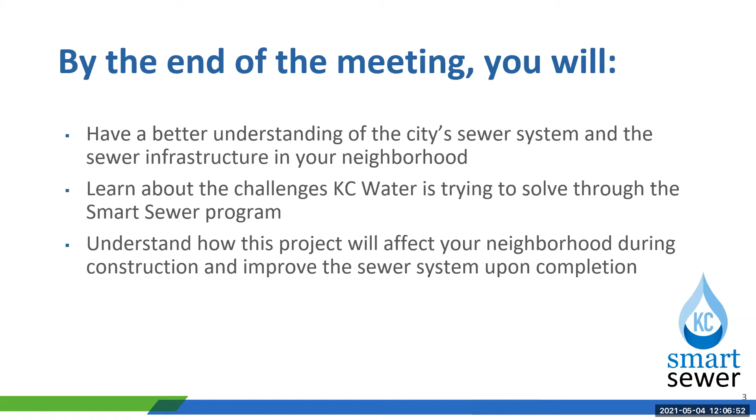Next, please. Just to give you a quick, broader view of KC Water services and assets. We serve our customer needs for water, wastewater, and stormwater, and we manage an extensive list of public assets, as you could see, a few numbers on the screen.

A few highlights. If you look at our system as a whole, very extensive water assets, specifically our underground pipe systems. We have almost 6,000 miles of underground pipes that move water, whether it's drinking water, wastewater, or stormwater, through our three water systems. This is a lot of pipe. Just to give a little feel for it, it's more than a round trip driving between New York City and Los Angeles. That's how much underground pipe we don't see, but that we own and manage.

We also have one large water treatment plant and 6 wastewater treatment plants, safely treating drinking water and wastewater and discharging through that operation. We have a lot of other various assets in our system that help move water from point A to point B. Next slide, please.

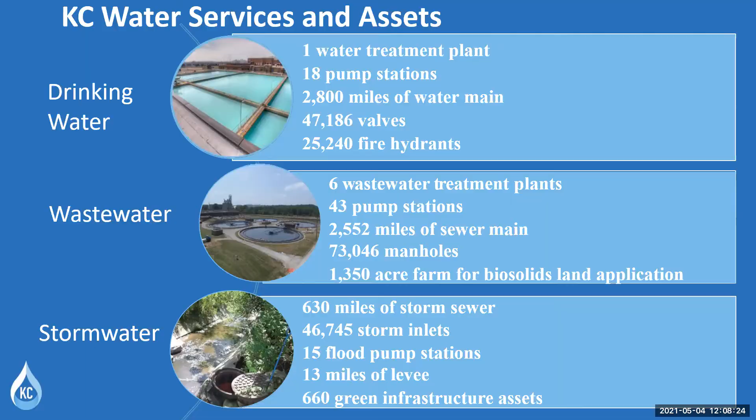Let's focus on sewer systems. In Kansas City, we have 2 types of sewer systems, what we refer to as combined sewer system and separate sewer system. In general, if you look at the map, we have central parts of the service area, about 58 square miles, outlined by the green line on the screen, south of the Missouri River, all served by combined sewers.

Some of these sewers date back to 1857. Outside the combined sewer area, both north and south of the Missouri River, about 260 square miles of the service area is served by separate sewer systems. Both systems are important for what they're intended for, but both pose some asset management and operational challenges, which is why we're talking about this project today. Next slide, please.

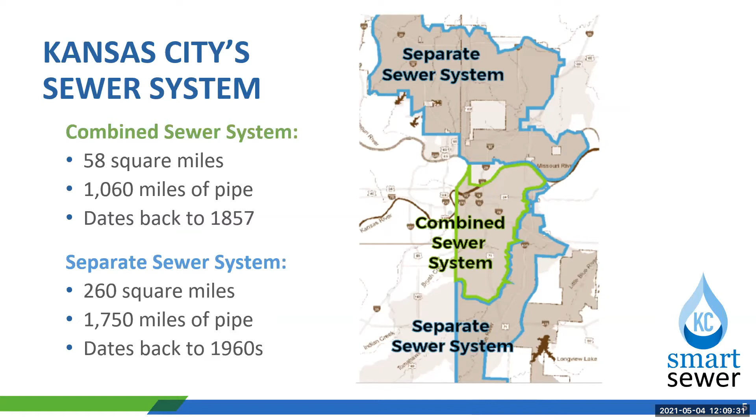It's a little bit of an overview of what we call a combined system versus a separate system, to give you a good reference to our current efforts. The combined sewer system, as you see in the figure on screen, is a single pipe conveyance system to take wastewater and stormwater and convey it to the wastewater treatment plant to be cleaned before it's discharged back into the Missouri River.

As you can see on your screen, the blue line and gray line: gray relates to the wastewater, the blue part relates to rainfall response, rainfall runoff, and stormwater. They all mix together. Now, during dry conditions, like right now, the wastewater is collected and then conveyed to the wastewater treatment plant for treatment.

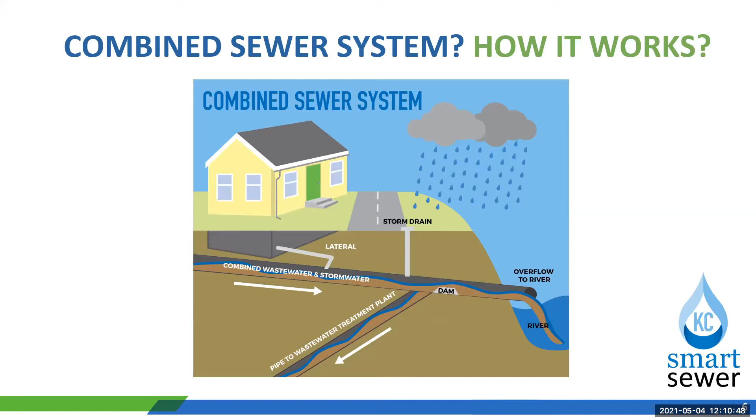When it rains, some of the stormwater runoff also gets into these pipes mixed in, and some of that flow still gets to the treatment plant, but a majority can overflow to the receiving waters. That's what we call combined sewer overflow.

The other system we have is the separate sewer system. In this case, the gray water gets into the wastewater or sanitary system that gets to the treatment plant, and the rainwater gets into the blue line pipe that takes the water to the receiving streams. That's how they're intended to be. While the combined systems were originally designed to protect when the sewer surcharges and backs up, the flow goes to the river, but they're designed to overflow.

However, we realized that creates pollution concerns and whatnot, and that's where the combined sewer overflow regulations came up, and our ongoing efforts to reduce overflows.

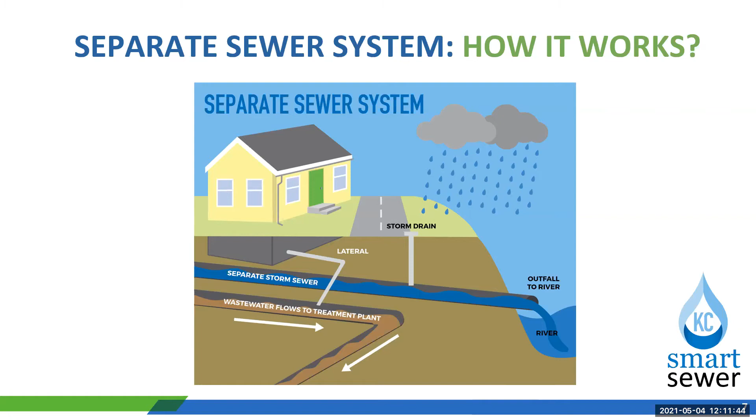Some of the Kansas City challenges you've probably already heard of, but for context purposes: we have sewer overflows because of the combined systems in the areas we identified. In addition, the system is designed to overflow, but our systems are also aging. With aged systems come condition issues. Some of our sewers date back to 1857.

We have capacity constraints in the system that create sewer backups and service issues. Any overflows to the receiving streams or any surface overflows, if they happen due to operational issues, cause pollution concerns, water quality concerns, and public health and safety issues.

While we are managing this vast amount of underground system, our past sewer rates did not reflect the true cost of maintaining this wastewater infrastructure, which amounts to about 2,700 miles of sewer. So we're always catching up, trying to improve the systems and reduce overflows. That's a huge problem for us.

As a result of the overflows, we have a federally mandated consent decree to reduce combined sewer overflows and improve our water environment. As you know, we have what we call the Smart Sewer program to conduct many projects to reduce overflows as mandated in the consent decree.

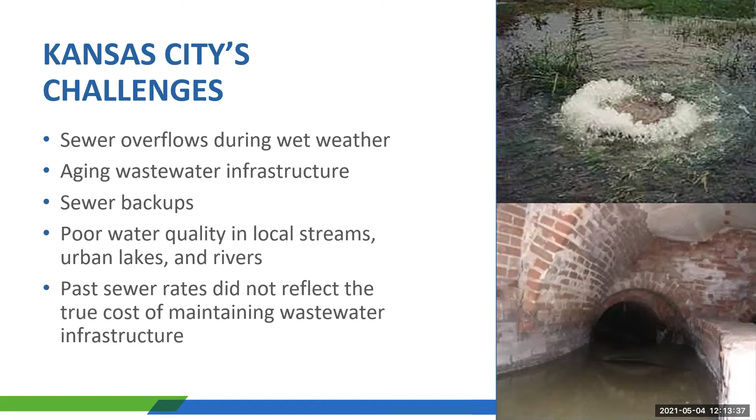Part of that Smart Sewer program involves doing a variety of things, various solution types, in combination to reduce combined sewer overflows, either through a single solution or in combination.

You hear about green infrastructure, sewer separation, which is the point of this project. In some cases we improve capacity of the systems to contain the flow without overflowing. Separate systems also reduce inflow and infiltration into the wet weather flow. So there's a variety of things on the sewer system side, but also adding additional treatment capacity for wet weather flow.

An important part of moving the water is our pump stations and treatment plants. So there's a variety of things all together.

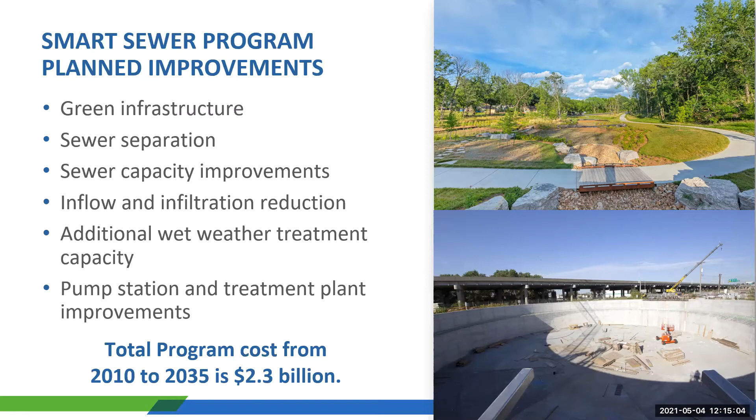At this point, the total program cost from 2010 to 2035 is $2.3 billion. Our consent decree was recently modified as of March this year, with extended completion time for the program through 2040, but we have committed dollars through 2035 from the beginning of the program at $2.3 billion.

Now, the program has many, many projects, but the 31st and Broadway Sewer Separation Project is one piece of the Smart Sewer program. It is required by the consent decree to be completed by December 31st, 2022.

So again, KC Water in this area will be installing a second set of pipes to separate the combined system into one set of pipes for wastewater and one set for stormwater, helping us reduce overflows from the 31st and Broadway neighborhood to Penn Valley Park. So this is the project, and Willie Williams will talk about it in a few minutes, getting into more project information.

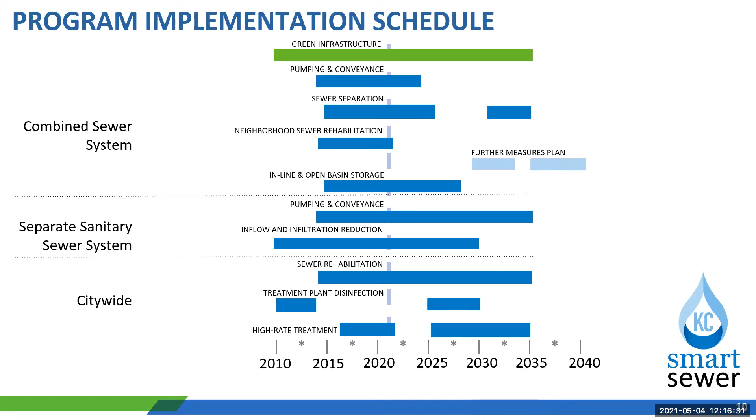Willie? Sure. So yeah, great.

So as the project title says, this is the 31st and Broadway project. Essentially, as Srini described, it's a sewer separation project happening in the Turkey Creek Basin, roughly near 31st and Broadway.

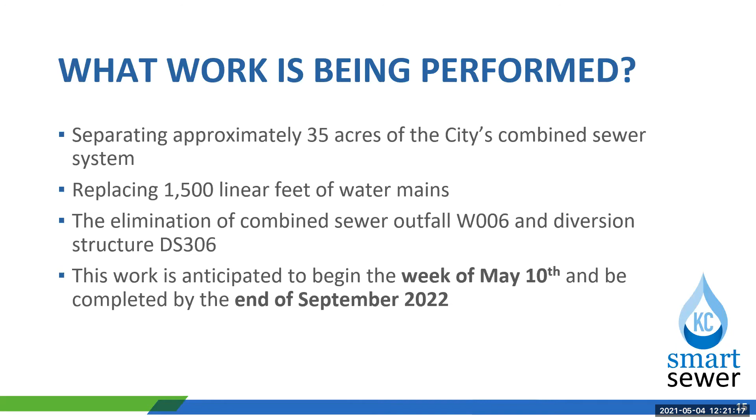The project will have several benefits to the stakeholders in the Turkey Creek Basin. We're going to get improved stormwater collection and conveyance, which can help reduce the ponding that you may have previously experienced in the area.

We're going to improve the reliability of the water distribution system as we replace 1,500 feet of water mains along Central and Wyandotte. We're doing some rehab to existing sewers in the area, such as CIPP lining and point repairs, as well as replacing and rehabbing manholes and some storm inlets.

We're adding permeable pavers in the alley behind contract furnishings, which will greatly reduce ponding that happens in that area. The ultimate benefit of the project is we will be improving the water quality of local streams, specifically Penn Valley Lake.

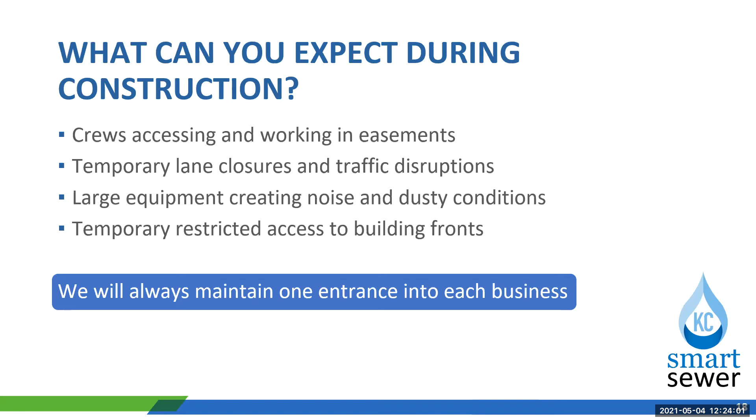Doing good, Willie. Hi everyone, my name is Taylor Rippey and I'm also with Parson Associates. As well as helping with communications on this project, I'm also helping with communications on the upgrades on Main, which I'm sure you all know about, where KC Water is making improvements to the aging water and sewer infrastructure, along with 15 plus private utilities relocating to pave the way for the KC streetcar.

Every Friday before noon, we send a weekly construction update that will let you know what to expect on the corridor the following week, including construction activities related to this project. If you're not signed up for that weekly construction update, I would highly recommend signing up. You can find that at kcwater.us/upgradesonmain. I also sent it in the chat a little bit too early, so I can send it again so you can find it.

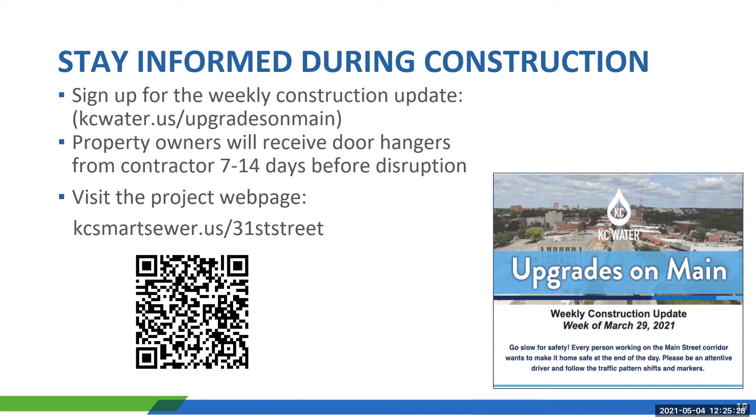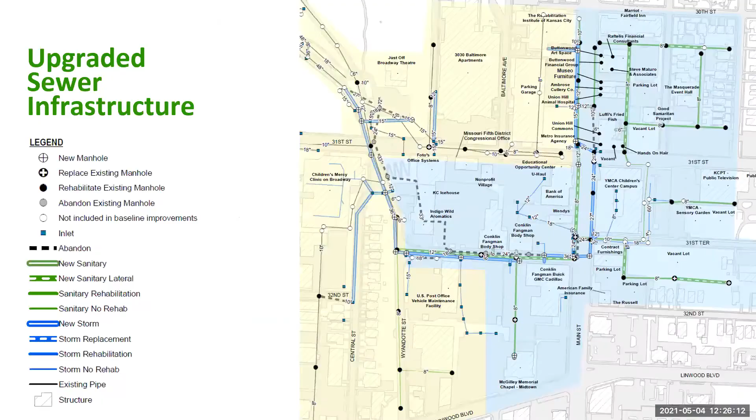Okay, there's a couple of ways you can ask questions. You can drop them in the chat box like Stan did already and already got a question answered. Or you can click on your reactions icon on the bottom of your screen and choose raise hand. I also think we're a pretty small group today, so if we overlook you, just speak up, please. We want to answer all of your questions.

I'm going to first read over Stan's questions. He asked, would it be possible to get the PowerPoint presentations? And Taylor answered that yes, they are going to be on the kcsmartsewer.us/31st Street website, but we'll also send them to you via email. And then Kathy, you have your hand up.

Yeah, I live on Walnut Street between 30th and 31st Street. So our street is shut off on the south end now. To get out, I drive through the KCPT parking lot. I guess that's how you get out of here. And will we always be able to do that? It doesn't look like there's any pipe directly down Walnut Street. It looks like it's in the alley between us and Main.

Are you able to answer that, Willie? So is the question, will you continue to have access to your street, Kathy? Well, from our street to 31st Street and out like we do now. It's a weird way out, you have to cut through a parking lot to get out. There's only 3 houses on the street, so it's really no big deal, but it's kind of weird.